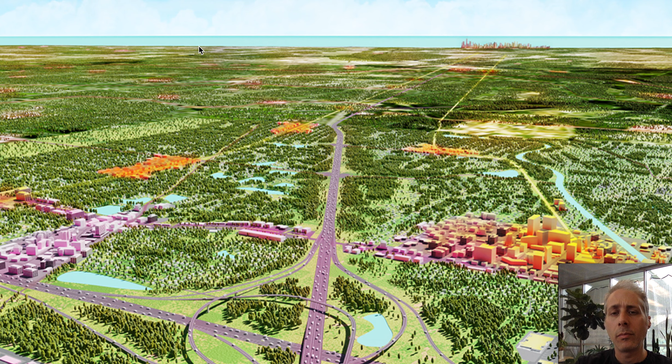So instead, as you'll see in our work for the 2050 plan, including this image here, we focused on designing specific pockets of dense crowding, which we sprinkled throughout the Chicago Metroplex to stimulate collective opportunity and ideally to improve everyone's quality of urban life. We did this because we think that true urban quality comes from accommodating density and diversity in the same place. I believe that different, even conflicting uses and users can coexist and enjoy the convenience of co-location if they are accommodated in an urban framework that allows everyone to be willing neighbors.

More generally speaking, at UrbanLab, we believe that planned and serendipitous urban encounters are the foundation of friendliness and even the material basis of democracy itself. We believe that the frequency, character, and purposeful design of face-to-face encounters greatly define quality of urban life.

As we all know too well, the nature and availability of face-to-face run-ins is under repeated pressure, including, of course, global pandemics. We've also seen the rise of low-density suburban sprawl and the rise of virtual social networks, both of which have the potential downside of estrangement. And now we have enforced social distancing that could impact our otherwise urban lives for years to come.

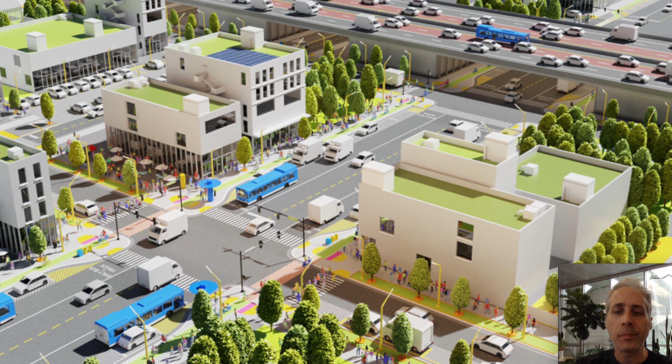So let's look at several design principles underlying energized crowding in the 2050 plan. And we're going to do this from the bottom up, from the scale of the urban block, like the blocks we can see here. It might seem counterintuitive to assume that creating a regional plan would begin at the relatively small, modest scale of the city block. But as urban designers, that's exactly how we think and work, from the bottom to the top.

Designing an urban block begins at the edge, or the perimeter of the block. By grouping different buildings to create perimeter enclosures, extra controllable internal spaces are created at no extra cost. Enclosures between buildings within a block provide privacy and security. As life inside buildings extends into exterior courtyards or backyards or alleys, enclosed space is protected both physically and visually.

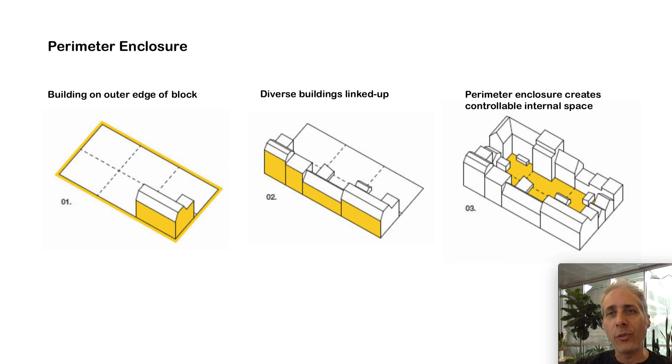When multiplied, groups of blocks create other types of spaces, streets and other public squares that can also come at no extra cost. These spaces are defined by the edges of the blocks, allowing public access between them. Using minimal material and space to enable different activities to develop, this pattern solves the greatest challenge in urban design, which is accommodating density with a diversity of building types and uses.

A key characteristic of the urban pattern of perimeter enclosure is its ability to deliver density with lower heights. A classic urban block with around 4 or 5 stories does much more than its modest appearance might suggest. Enclosed buildings can create a symbiotic urban system for many different co-located activities. The combination of density and diversity of building types and uses with a compact footprint on a human scale makes for an environment that is both efficient and multifunctional.

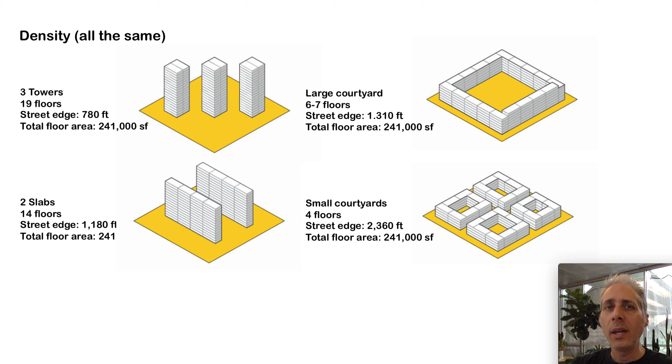The same build density can be delivered with a very different building typology and very different in-between spaces. The 4 examples of built forms shown here all have the same density. Each has a total floor area of about 241,000 square feet.

Back to Malmö, the enclosed block can also make its own weather. This courtyard pattern is designed to be wind protected and become a microclimate in the winter and a shaded oasis in the summer. The taller buildings facing the sea block the cold winter winds, while they provide narrow walkways between them for pedestrian access.

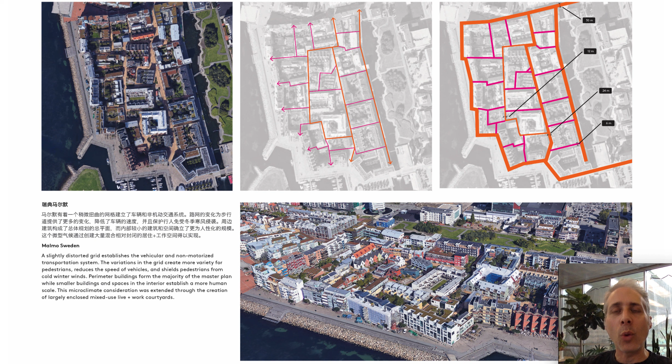The third design principle to discuss after density and perimeter enclosure is linking up. That is, linking up independent buildings on the same block. Connecting independent buildings to one another is done with firewalls, blank, windowless walls on both adjacent properties that prevent the spread of fires. This foundational, fundamental urban structure allows for the juxtaposition of buildings, and it saves a considerable amount of space that is wasted where there are gaps between buildings.

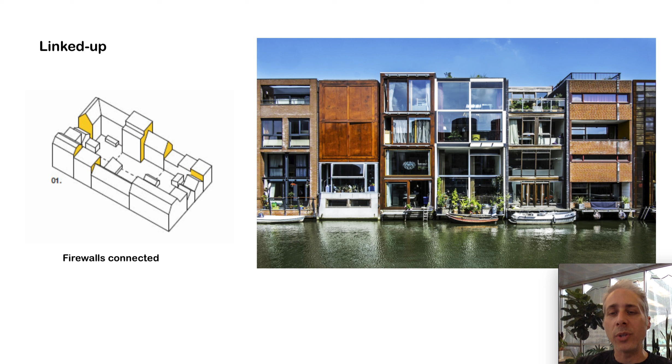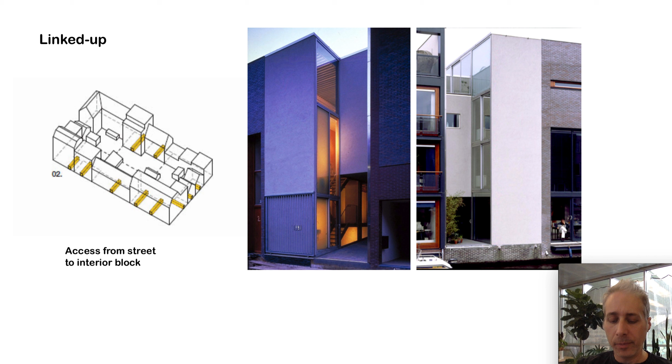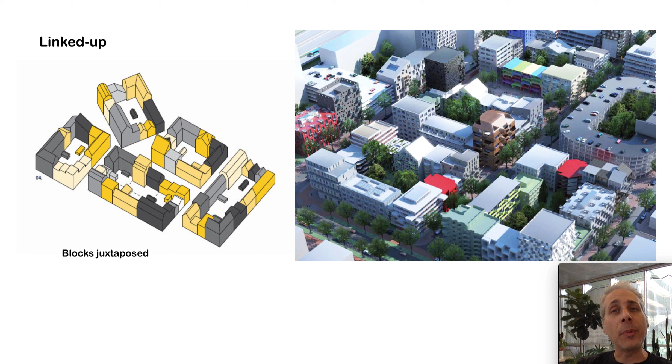The double wall created by side-to-side construction helps to insulate the buildings, reducing energy, reducing noise, reducing vibration. In Chicago, when buildings are linked up, they need to have at least 2 independent access points to the street or the public way. The system of linking up and juxtaposing can allow a great deal of diversity in each block. Linking up can be scaled up to a whole neighborhood, enabling limitless variation.

The diversity of use and users can contribute to a sense of community and make walkable neighborhoods safer. A mixture of dwellings, workplaces, businesses, services ensures that people are using sidewalks throughout the day and night, which adds to the safety of the city. The inclusion of very small buildings radically changes the feel of a place, giving density a human scale and making room for varied activities that can add vitality.

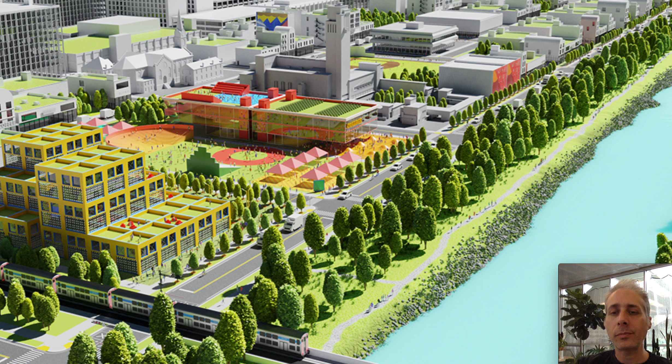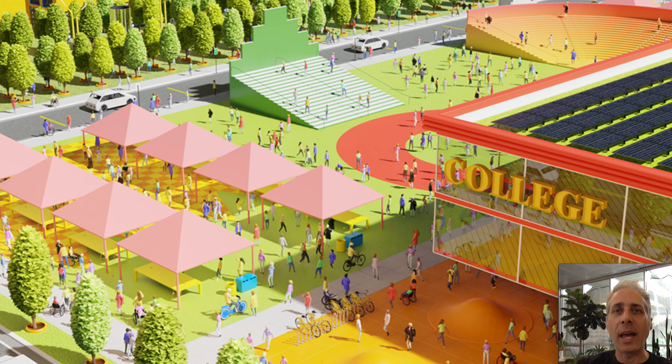In this urban design proposal for the 2050 plan, we demonstrate ways of infilling blocks around schools and linking in new buildings with a new centralized public space. The new park is used by the school during weekdays and by the community in the evenings and weekends. The goal here is to demonstrate ways to rebuild communities throughout the Chicago region to create opportunities close to where people live, which also increases local revenues and enhances local government capacity to help people increase their own quality of life.

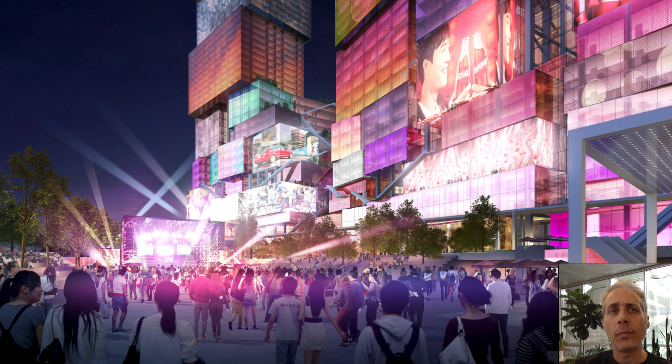As a fourth design principle, there is a vital difference between layering and conventional stacking. Unlike layering, stacking merely places the same functions on top of one another, like in this residential building. Layering places different functions and programs on top of one another and makes the most of distinctions between each space.

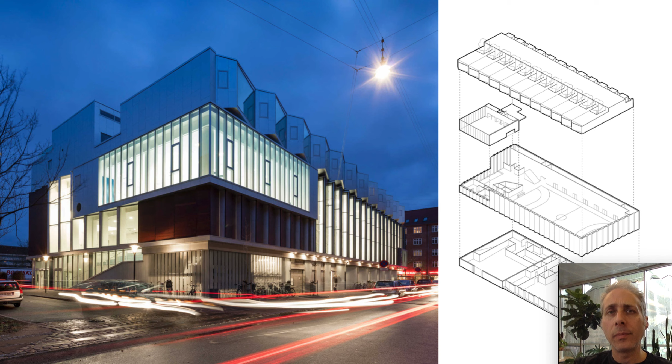Ideally, we believe that urban buildings should have clear horizontal layers, changing in character as they go up from the street level toward the roof, as they access light conditions that differ floor to floor. The layered building accentuates these differences. The Amager sandwich has 3 distinct layers with a supermarket on the ground floor, sports facilities in the middle, such as a gym, and top floor apartments connected to the roof on the top.

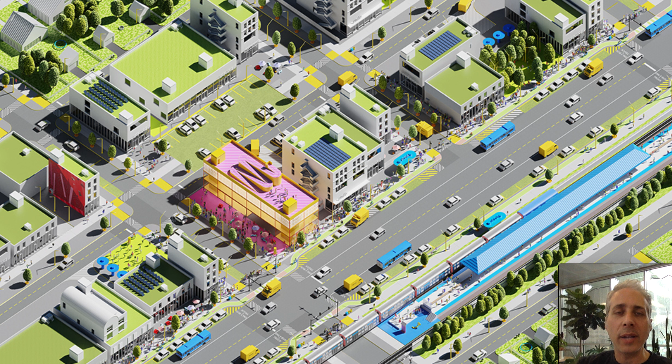In this urban design proposal for the 2050 plan, we demonstrate ways of infilling blocks around important commercial corridors that are linked to public transportation. We are also responding to residents across the region who increasingly seek places where a car is optional so they can walk to shopping, entertainment, and many other services. Consumer research shows that many people in the region want to live in a walkable urban place, yet only a small fraction of the housing supply is considered walkable.

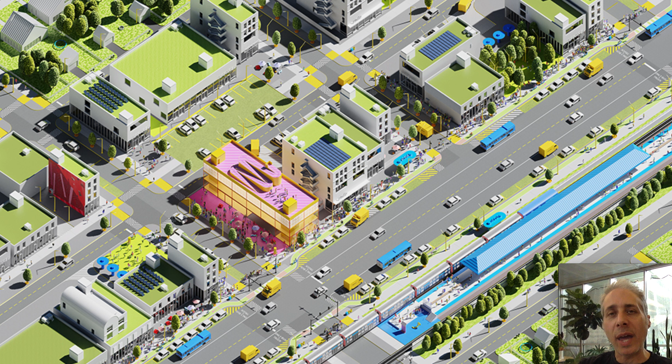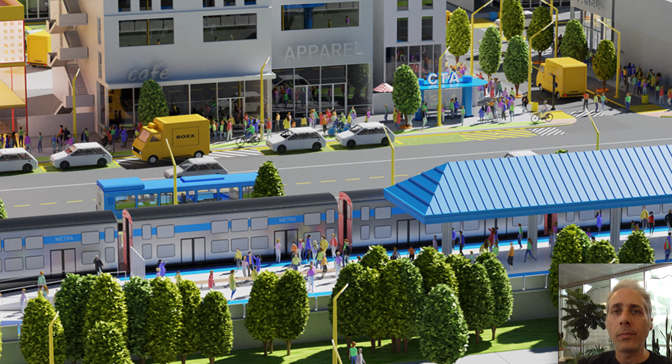This image also highlights a local online shopping pickup center, which is a layered building containing several different uses and functions a little bit like a third-place community center. This particular design proposal also highlights how we can redesign urban streets to better accommodate bike lanes and small delivery vehicles that bring us all those items that we've bought online. Which brings us to the next design principle of improving our ground game.

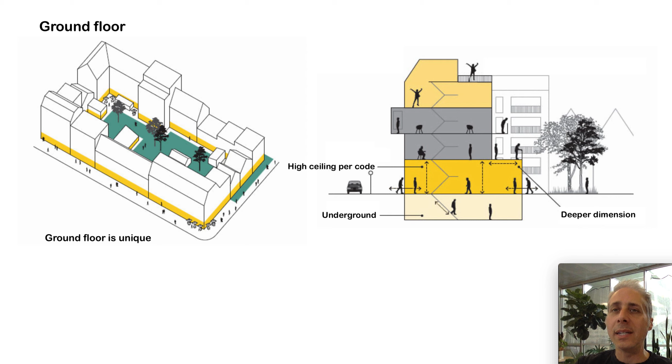In layered buildings, the ground floor is very different in character since it connects to the public street and the public realm. The ground floor might also connect to an interior block, or in the case of Chicago, an interior alley. Ground floors, especially if they have generous ceiling heights, need to be designed more flexibly than other floors, and in this way can be more useful in accommodating programmatic density and diversity.

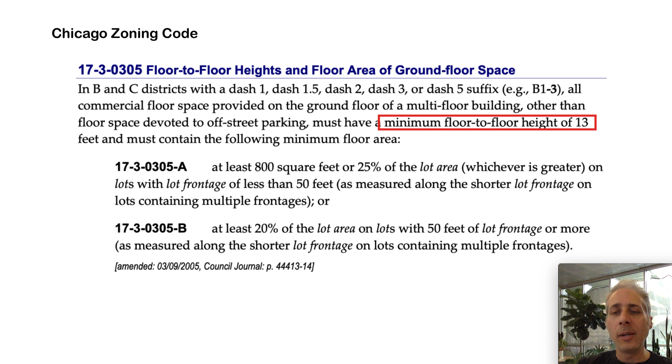City codes typically control ground floor commercial ceiling heights. For example, here in Chicago, the minimum floor-to-floor ceiling height is 13 feet, as we can see from this copy-paste that I took right off the web. As you know, active ground floors can help foster a sense of community and security, and ground floors support active mobility by making walking more interesting and making multitasking more possible.

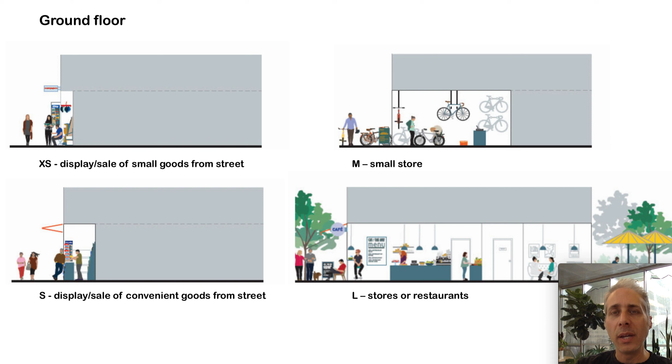Designing blocks to support small, independent businesses is crucial to the fiscal health of a local community. Here, we see different scales of storefronts that support various small businesses, especially from those entrepreneurs in the local community.

The most flexible space for business expansion is, of course, the sidewalk. The sidewalk can be used for just about anything. Perhaps more than any other ground floor program, tables and chairs on the sidewalk generate dynamic street life and contribute to a more diverse and high-density use of urban space.

In the same way that the enclosed block delivers proportionally more ground floor, it can also deliver proportionally more top floor, especially compared to a high-rise building. The top floor has the potential to have many of the same qualities of a suburban house, such as privacy, light, private outdoor space. The top floor in this sense can be leveraged to attract all sorts of people to invest in urban living.

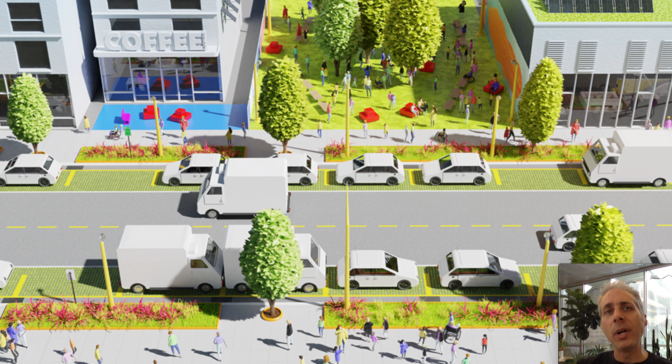Here we're also highlighting the value of green infrastructure along the streetscape to cool down commercial corridors, increase property value, and mitigate flooding during heavy rainstorms. The final principle for today is spatial diversity.

If we make a simple comparison between a linked up and layered building in an enclosed block and a standalone stacked building in an open landscape or parking lot, the freestanding building generates fewer kinds of space than the one that is part of a dense, dynamic urban block. In this design proposal for the 2050 plan, we explore how the enclosed block with layered buildings offers considerable spatial diversity.

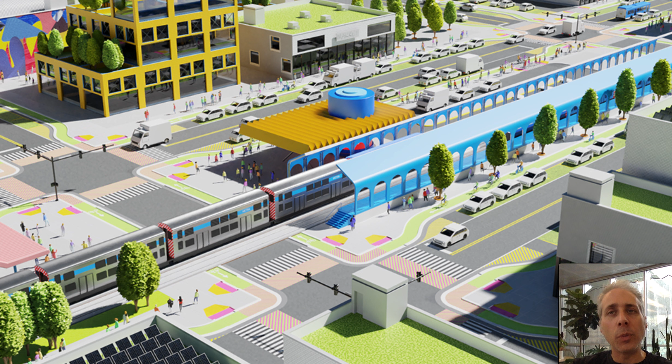Here, we speculate on how the town might evolve as it reinvests in upgraded streets and sidewalks to make walkability safer and more convenient. And we predict how these public investments will spur private investments by building developers or businesses who see value in an upgraded transit-oriented community. After all, if someone who works in the Loop can walk to this suburban Metra station, they're effectively walking to work.

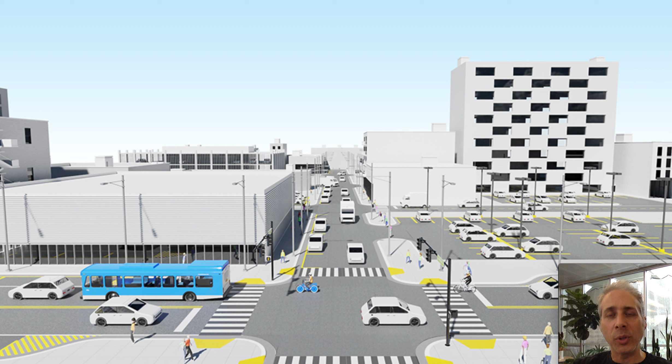It's the robustness of a fine-grained urban grid that makes for resilience, simultaneously accommodating larger components of the city with public life. Together, we get a system of independent yet linked up fractals with limitless permutations. The totality can make a resilient system, accommodating difference and tolerance to change over time. Here we also see hints of a new future-oriented transportation system, which will be the focus of the next talk.

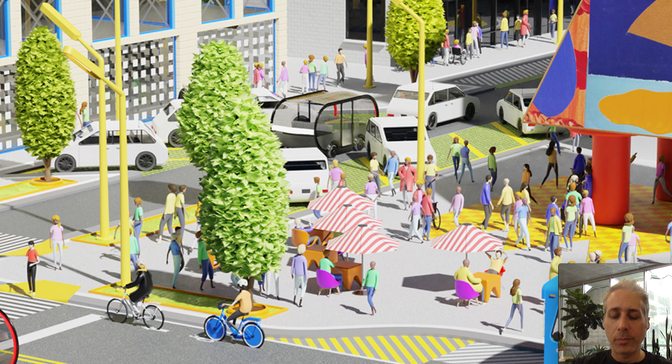In the meantime, I look forward to our question and answer session where we'll discuss how the Chicago region can seize its destiny rather than leaving the future to chance. To thrive, we must address our challenges collaboratively and ensure Chicago's global status as a center of commerce and a place where opportunity is open to everybody.